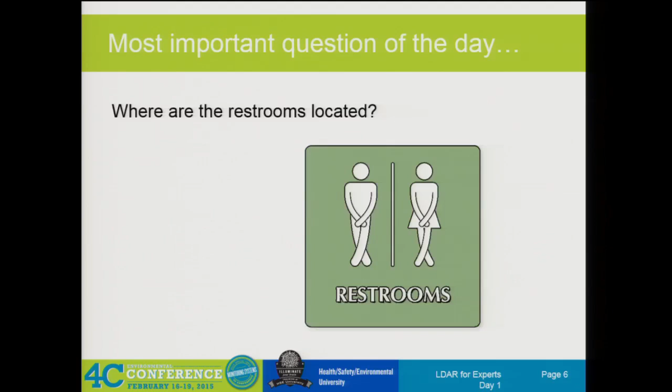They're not connected. You may have to help me get connected here. Chris?

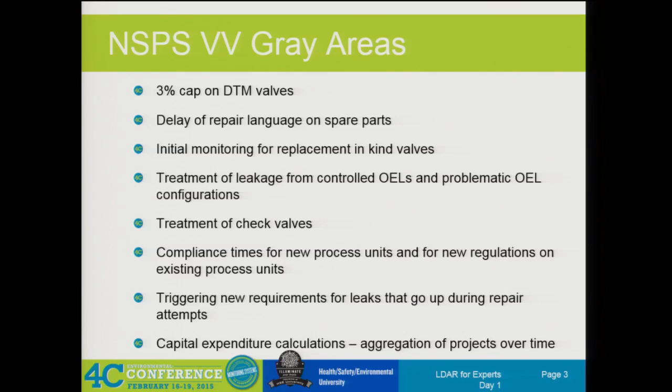All right, so we're going to start with NSPS VV, and since it was the very first of these rules and kind of set a pattern, there's quite a few things that are gray in it. In fact, the white pages that are in there are probably fewer than the gray pages, I think. And it keeps going. So we're going to deal with each one of those. I'm not going to talk about them now because we're going to get to them individually.

So we'll start with the granddaddy, the 3% cap on difficult to monitor valves. And for those of you who are really quick, we're going to have acronym soup all day long. So if there's any of these that I don't identify quickly, stick up your hand and ask if you don't recognize it. So here's the language in 482-7 subparagraph H.

Any valve that is designated as described in 60.486(f)(2) as a difficult to monitor valve is exempt from the requirements of paragraph A, that means A of 482-7, if the owner or operator of the valve demonstrates that the valve cannot be monitored without elevating the monitoring personnel more than 2 meters above a support surface. The process unit within which the valve is located either becomes an affected facility through 60.14 or 60.15, or the owner or operator designates less than 3% of the total number of valves as difficult to monitor.

In addition to that, you're going to have to follow a written plan to monitor it at least once a year. So, relatively straightforward, right? It just jumps right out at you what we're talking about here. One of the things that make these rules hard to understand are these embedded numeric paragraph references. These two right here in particular, this is subpart VV of 40 CFR 60. 60.14 and 60.15 are in subpart A. It was developed way before NSPS, but they're still referring back there.

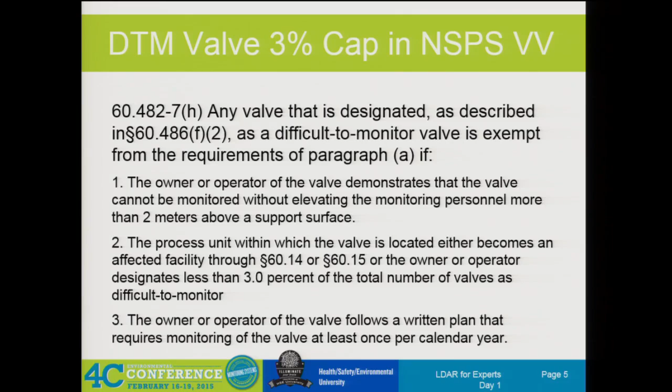So the first thing we got to do to try to understand this at all is go look up all of these numeric references and figure out what they're talking about. So if you trace 60.14 in subpart A back, that's the modification and the rules about what is involved in causing a modification that would trigger NSPS. 60.15 is the reconstruction section. So in a general way, not specific to LDAR, but just in general for all new source performance standards, this tells you what modification is and reconstruction is, and tells you something about the compliance times and a lot of other stuff. So there's some good information in there.

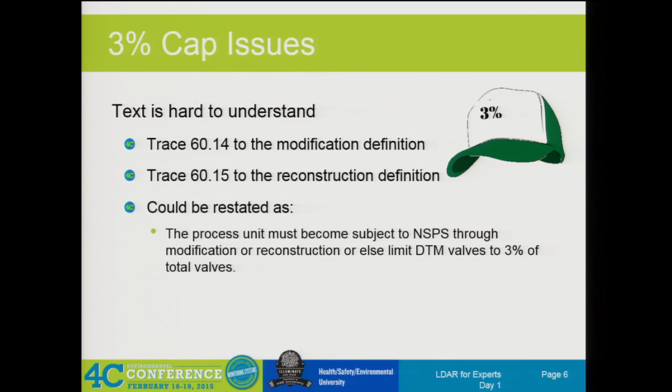They're worth reading. So you could restate that other part as the process unit must become subject to NSPS through modification or reconstruction, or else limit DTM valves to 3% of total valves. Okay, makes some sense. Starting to make some sense.

But, you know, nobody in here said anything about being a lawyer. Are there any lawyers in here? Okay. If you're hiding the fact that you're a lawyer, don't be offended by the things I'll say about you. But, I mean, the world would be just so much easier if it wasn't filled with lawyers.

So, if we think back to how could you become subject to a new source performance standard other than modification and reconstruction? When the rule was written in 1981, there was only one other way to get in, and that was to build a new plant. Like the name implies, a new source has come in, and it would be in the rule. So it seems once you get those two sections translated that it was really meant for new construction. Okay?

But since that time, EPA's written a lot of other LDAR rules, dozens. And they looked at NSPS VV and said, we've already created this masterpiece. Why should we write this same language over and over again? So they went and wrote GGG, and they wrote the applicability for it, a few definitions that were different, some testing protocols, light liquid defined a little bit differently than it was for the chemical facilities. And then besides that, they said, go comply with 482-1 through 10.

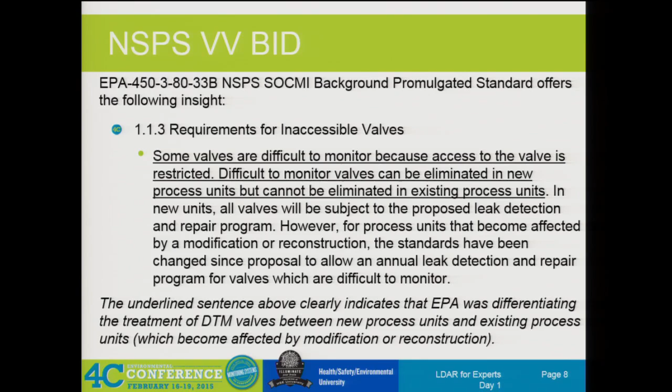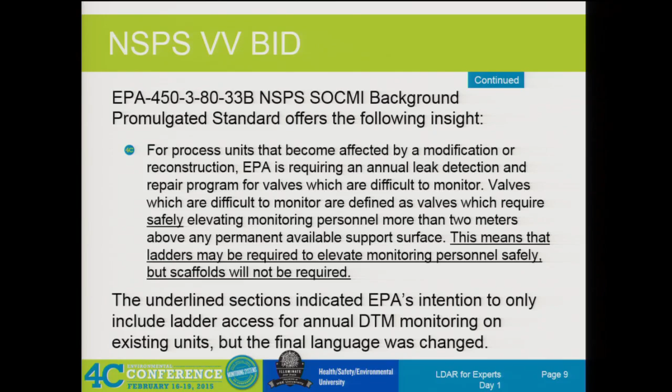There are plants that are represented in this room today that spend $1 million a year on scaffolding for DTM LDAR, primarily out in the interconnecting units and the flare runs. So this went by the wayside, but it's certainly an interesting piece that we ran across. Well, why would EPA just single out new units for a cap? I mean, if you shouldn't have that many difficulties, why not cap them for all kinds of units, right?

It's the difference between design for that limitation versus retrofit. And the whole idea of new source performance standards was that when you design a new unit, no matter what kind of emission control you're trying to build into it, you have more flexibility to get that done than if you retrofit the control to the unit.

Now, some kinds of controls don't really do that as much. If it's an end-of-pipe type thing, that you can run something that you were venting to the atmosphere through a carbon adsorber, through an incinerator, something like that, the cost to design it versus add it on may not be that different. And actually, most of LDAR is like that. It's a work practice that we have to do, and the work practice is not any less expensive for a new unit than it is for an existing unit.

But this is one of the places where new versus existing makes a big difference, because you got an existing unit out there. Some of those built World War II era are still in use, and it's not unusual to see 15 to 20% of total valves that are up in the rack with chain wheels or whatever hanging off the sides of columns that are genuinely difficult to monitor, very difficult to monitor in some cases.

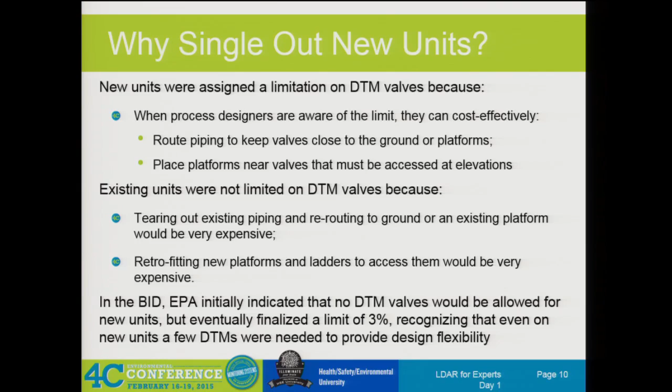So what people do when they have to comply after something's built is they'll take the least difficult and keep working through that hierarchy until they reach the 3% cap if they have to do it. But that's putting people into some danger, some jeopardy, a lot more often than they ought to have to do it. And it's a lot more expensive than you should have to do it. So the difference between designing it into a new program and retrofitting it is a big deal.

HON is somewhat better on it. It says process unit within which the valve is located is an existing source, or the owner-operator designates less than 3%. So that's fairly straightforward. They didn't get into the numbers. They didn't get into modification and reconstruction. Those really don't apply too much on a MACT unit anyway. But it's pretty clear here it was existing versus new. Okay? So that gives us something more to boost our confidence.

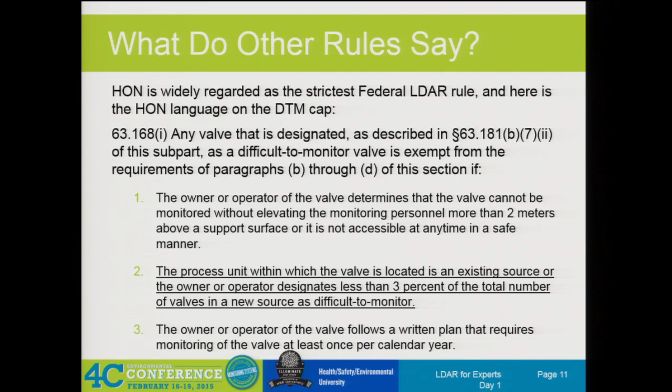So some conclusions on this. It has been literally interpreted to mean anything that didn't specifically come in via 60.14 and 60.15 for modification and reconstruction. At the time it was written, there was only one way to do that, and that was to build a new unit. But since then, we've got a lot of other things. And we still see a number of plants around the country that just blanket everything to 3%.

Okay? It's one of those ultra compliance assurance things, I guess. But the EPA guys, at least person to person, have verified, yeah, you're right, that's the way it should be. But they're not going to do a clarification until somebody actually formally writes a letter requesting it. It hasn't happened yet.

Chris, we saw something fairly new on this that I think added some weight to that as well. I'll see if I can pull that up and get it for you at lunch. But this came to our attention after we had to submit the final slides for this. That's why it's not in here, but I'll pull it up over lunch. All right. All right.

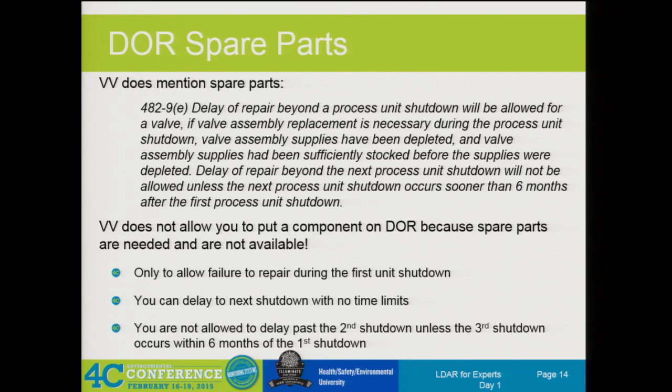The second one is if you have isolated it from VOC service for VV or from HAP service if you're under one of the MACT rules or NESHAP rules. Maximum Achievable Control Technology, NESHAP, National Emission Standards for Hazardous Air Pollutants. HAPs is hazardous air pollutants. So got a few of those acronyms I have failed to define.

So anyway, don't use it for the original. Put those 4 allowed reasons on your form with a checkbox. And then if you want a few lines to elaborate on why it's technically infeasible or how you've isolated it from service and so forth, that's good.

Before we leave the isolated from service, how many of you continue to monitor your delay of repair components that are isolated from service? I see some low hands. Yeah. What do you do when you start to get higher readings on them? Has it ever come up? Yeah. Yeah? It's not technically isolated. Yeah. Start looking at isolations.

One of the things operations guys like to do is say, okay, we blocked in the suction and discharge valves on this thing, and we drained it. It's isolated. Okay. When you come back and you monitor it and you get 50,000 ppm on that isolated component, it's no longer isolated. Okay? I mean, that's pretty clear. So what do you do then? You've already got a delay of repair that you've based on it being isolated.

Well, if you're leaking through one of the valves that isolates it, then it becomes technically infeasible without a shutdown. Because even if you wanted to pull that pump out and repair it, let's say it's a pump, that's where it happens the most, you couldn't isolate it to do that safely. So basically you have to go in and change your DOR documentation reason from isolated to technically infeasible without a shutdown. The key is to do that as soon as you start getting elevated readings.

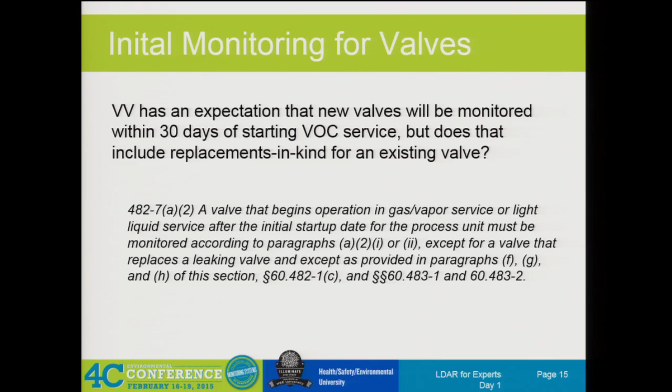Because you might work your way out to a quarterly or semi-annual or even annual monitoring period on the rest of the valves in the unit. So you may not be there within 30 days of when that thing goes in to see that you've got a new valve. So how do you find out about it? It would be really nice if this didn't apply to replacement in kind. So, monitor the valve is in paragraph A1. The valve must be monitored the first time within 30 days of its startup period. What's startup period? That's not defined in the rule.

If the valve's in a process unit, well, this is if you're in a skip period. NSPS skip periods are highly frowned on by EPA these days. Not many people using them. Anybody in here using an NSPS skip period? You are, sir? Yeah. Well, if you get to a consent decree, they'll probably force you into quarterly or do what they call a sustainable skip period. They've written a few that allowed that, which says you have periodic audits you have to do under the consent decree, and whatever leak percent they get will determine your forward practice, your leak frequency. So if you've been underfinding your own leaks and an audit says it's much higher, then you're going to have to jump back to monthly or quarterly or something else.

But this just gives you a chance there. You either have the choice of doing it within 30 days, or if you can just assume that new valve leaks and that won't put you over the 2% leakers in that unit, then you can wait either 90 days or till the next regular monitoring on that unit.

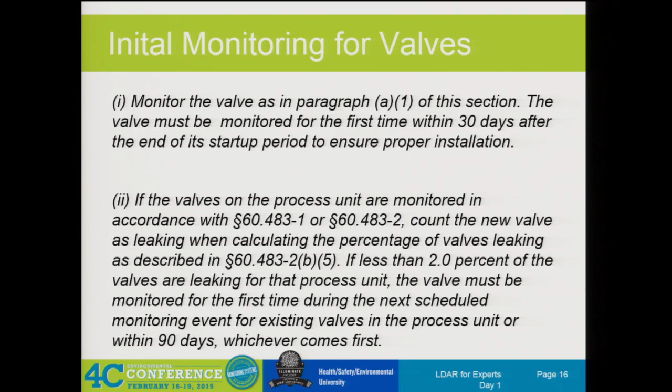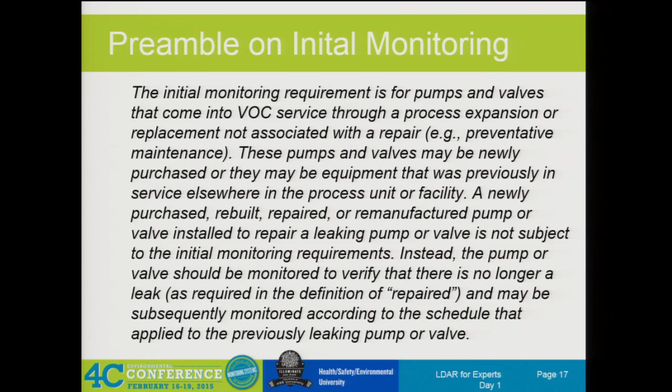So, if it's a replacement in kind that was to repair a leak, then it doesn't have to follow the initial monthly, but it has to follow 482-7C that says when a leak is detected, you'll go to monthly monitoring until you have 2 consecutives. So there's no change. I don't even know why they put the exception in there, because you're in the same position of 30 days, right? And all it's done is get people confused again. So leak repairs, you still have to do it. Yeah, the alternatives, not so much. All right. This is one that came up in enforcement initially.

Actually, down in this region, Region 6, I think was the first area it popped up. We had people out from the agencies, both the EPA region and the states, doing some comparative monitoring. So that's kind of a new thing from the late 90s forward. And when they came to a valve that had a plug or a cap on it, they'd go ahead and monitor the plug or cap too. And they started noticing that, boy, these things leak pretty often.

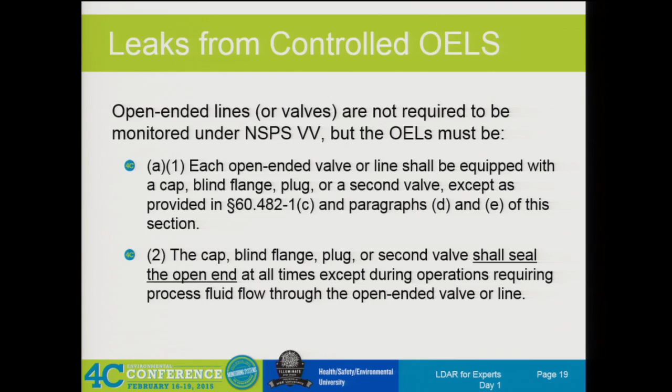And so they used that as the justification to write NOVs for open-end closure devices, as EPA started liking to call them, that have a reading above, say, the valve leak definition, 500. Most states, most consent decrees and things moving down there. Now, what does it mean by seal?

If you go to the dictionary, there's more than 24 entries for seal, including the cute little marine mammal that bounces the beach balls around. That cute little emblem on the front of the podium when the president speaks is a seal. The old things they used to do in the romantic novels where they'd put red wax on an envelope and stamp it with their family crest. Those are all seals. There are some that say it means to basically close an opening. And then there are modifiers, like to hermetically seal something means to seal it in a way that's airtight.

Okay? You need Johnny Carson folks in here with hermetically sealed and verified by Funk and Wagnalls or something like this that he and his sidekick used to always talk about.

But they're taking it literally and saying that seal means less than a leak definition around the potential leak areas, those threads. And we had in the uniform standards a proposal to say that any open-end closure device where you could monitor it and get a reading of 500 ppm or higher was an immediate deviation. As I mentioned earlier, the uniform standards are sunk under about 100,000 pages of comments and will probably never emerge.

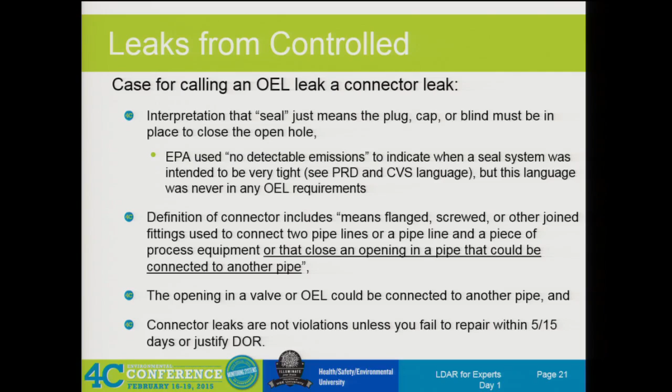So we talked through most of this kind of stuff. Here's a special deal on open-ended lines that comes up a lot. Besides the cap, plug, and blind, which are an actual closure, you're also allowed to comply by closing 2 block valves in a row before the opening to the atmosphere. And it specifically says that when you do that, you're supposed to close the upstream valve first and then the downstream valve. Why would that be?

Why would EPA care what order you open and close these things? If you close the downstream one first and then the upstream, you're going to trap product and pressure between those two valves. That means the terminal valve is now an open end, because one of the definitions of an open end is a single valve seat between the process and the atmosphere. So if you got process trapped between the valves, you don't have an open end closure. It's not a compliant system.

Okay? How do you get your operators to do that? How do you tell they did it? Well, unless you're standing there when they close them, I don't think there is a way to tell. So EPA would probably, based on like this 500 ppm thing, would say, all right, if we come along and we measure and we get some kind of a reading here, then obviously you didn't close them right.

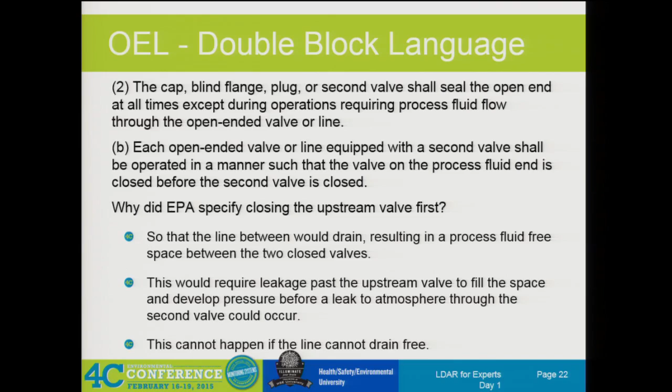So be careful with these double blocks. There's specific situations where even if you close the upstream valve first, you may not be compliant. We see a lot of these where maybe you've got a drain valve off the bottom of a control loop, and it's been set up to be a sample point. So the operator has got to get down there. Maybe that valve's 6 inches off the ground. He's got to tilt his bottle to get his sample. He's down on his hands and knees working.

This is ergonomically a mess. I'm spilling more than I should because I can't get the thing. So he gets a reducer and goes down to 1/2 inch or 1/4 inch tubing size, runs it over. So I'm going to be green. Let's take it over here by this drain hub, so if there's any splashing or spillage, it'll go down the drain, and up waist high. So I can have a gate valve there, and I'll put a second ball valve here, and I can, without bending and stooping, fill this thing up, less spillage, the whole 9 yards. I'm doing a good thing, right?

Except if you're saying you're controlling that by a double block valve, one here, one there, if you've got this kind of change of elevation, it's only going to free drain up to that point as you're taking your sample or venting or whatever you're doing. And so closing this and then closing that still traps process in all of that loop. So those are a much more subtle version that could get you in trouble.

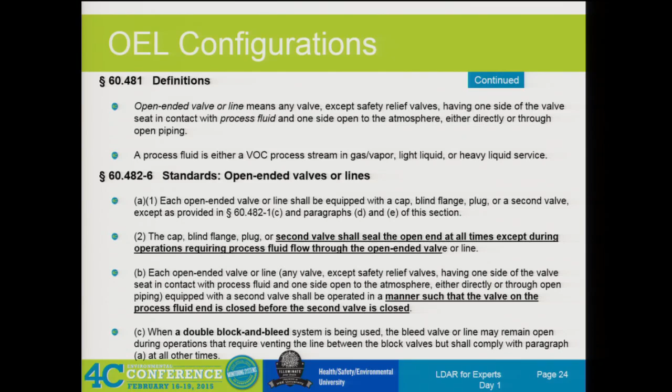Kind of a common sense issue. Nothing less common than common sense, right? And especially when it comes to regulators and enforcement people.

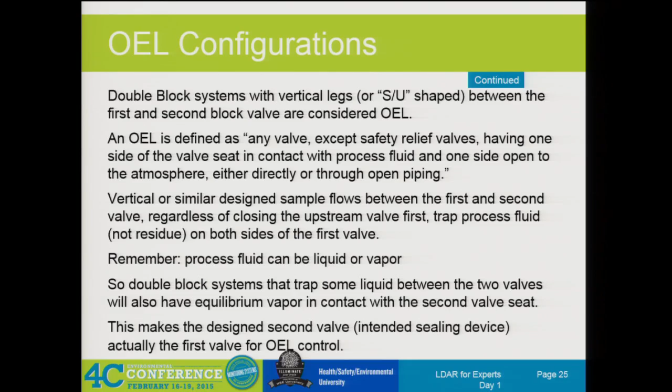So vertical legs, anything that traps material between the two. Process fluid can be liquid or vapor, so it's not only where the liquid is. Block and bleed systems, any of you use those? Got a block valve in line with each other and then a bleeder in between. If you want total isolation, you block both of those in, recognizing either one could leak past. You open the bleeder, and theoretically anything that leaks past one or the other will go out the bleeder without getting to the other component, cross-contaminating, or particularly if you have materials that could cause a runaway reaction or are pyrophoric, something that might cause big problems.

You can use those. And you are allowed, while both of the other valves are closed, to keep that bleeder open as part of a block and bleed system. So you can run that way. But you do have to close it as soon as you open either valve.

Okay? Now we get to a special version of that. I don't know if there's anything right here. We'll see it mainly in the components and low leak later on. But 12, twin seal valves. Anybody in here use twin seals? I know a lot of you do, particularly out in the tank farms. That's a block and a bleed built into a single valve.

It's kind of like a plug, and it's got a big quarter-turn mechanism, but it's got a full seat seal on either side and then a body bleeder. Now they come in several configurations or optional configurations. At the very least, they come with a thermal relief valve, because when that thing's open and then you close it, you trap it liquid full when you do that.

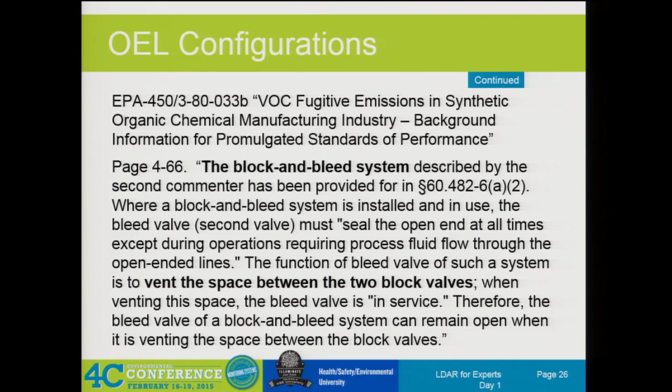So when you're running that valve open, that bleeder is a potential open-ended line. So that's one to watch out for. Engineering. Second valve, just more examples of where that's talked about, trapping fluid. Got that.

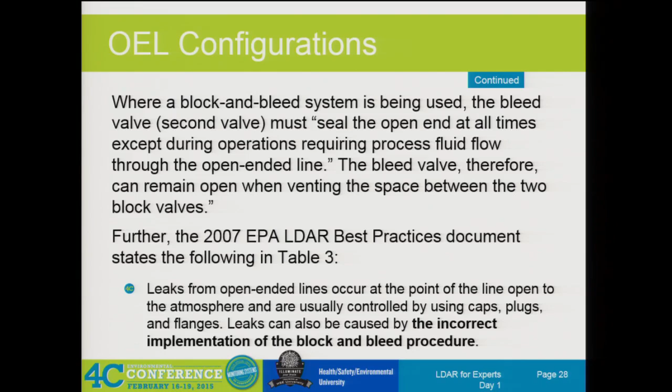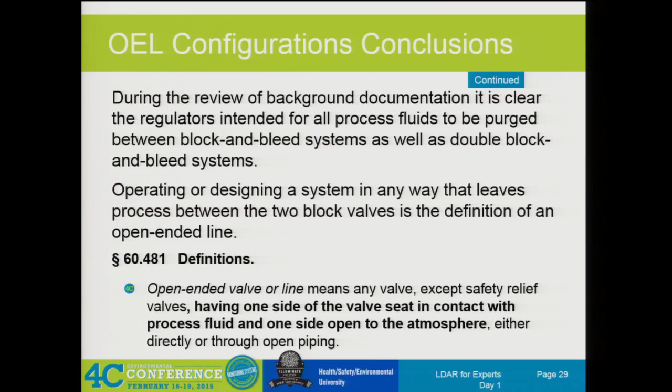All right, so you've seen the whole open-ended line thing is pretty complicated. Getting it right, enforcing it, all of these are pretty difficult things to keep straight. Now for something a whole lot easier. Check valves. That's a valve, right? Applies to 482-7. How many of you, let's do the hands. How many of you treat your check valves just like any other valve, monitor at the same frequency as all your valves? Okay.

You what? Depends on how it's configured. Okay. How many of you treat your check valves as a no detectable emissions valve and only monitor them annually? No takers on no detectable? How many of you say they're not a valve at all? If anything, they're more like a connector? Okay. Well, this is one where we do have an applicability determination.

Control number 01025. Somebody wrote in and said, is an inline check valve subject to the requirements of 482-7, or is it considered a no detectable emissions valve? EPA replied, since an inline check valve is enclosed within the process piping for directional control and does not have the potential for fugitive emissions, which are regulated by the standard, they may be considered exempt from subpart VV regulation as valves.

Then they didn't tell you what it is. Yeah, there are some that actually do have a test lever, I think they're called, or a hinge cover, nut, or bolt, and we'll see some of those when we go through the components. So there's a few types maybe I would consider a valve, but the determination we've got is pretty blatant that you don't have to regulate them as a valve.

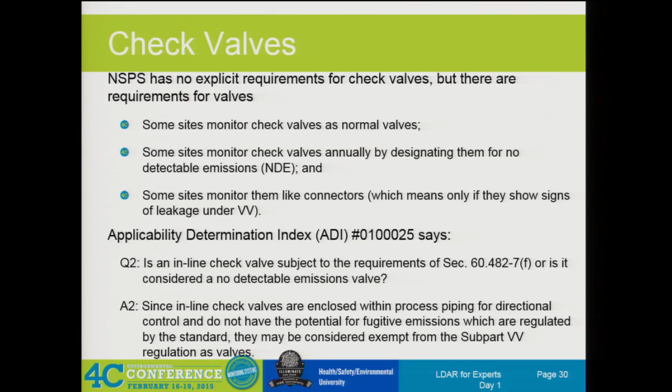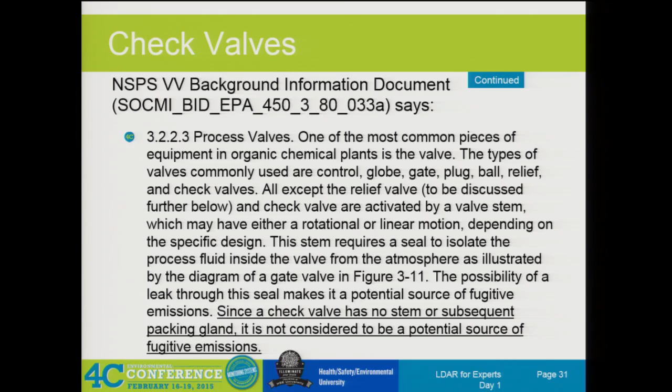And that is kind of connector-like, and that's probably why the majority of the hands I saw go up treat these as connectors, which in a refinery means if you see, hear, or smell, AVO detection, then you come check it. Otherwise, no scheduled monitoring or maintenance. Early stuff talked about the lack of a stem penetration, that being the characteristic emission point of the valve. All right, conclusions are pretty straightforward.

All right, this was an interesting one. The original 482-7 for valves said you start off at monthly. Any valve that has not had a leak detected for 2 successive months may be monitored the first month of every quarter, beginning the next quarter, until a leak is detected. Okay? They wrote this in 1981 when there were virtually no units under LDAR.

And they were thinking, you know, plants will have a sprinkling of these units become subject to this over the years, but didn't think too much about how it might create a situation where your labor requirements would be very unbalanced. Okay? If we had to literally do all of our NSPS valve monitoring in January, April, July, and October, we'd have to bring on extra staff in those months and then let them go for 2 months while we did the rest of the annual and quarterly stuff. Well, that's the quarterly valves, the bulk of the quarterly stuff there. So that would be an unworkable deal.

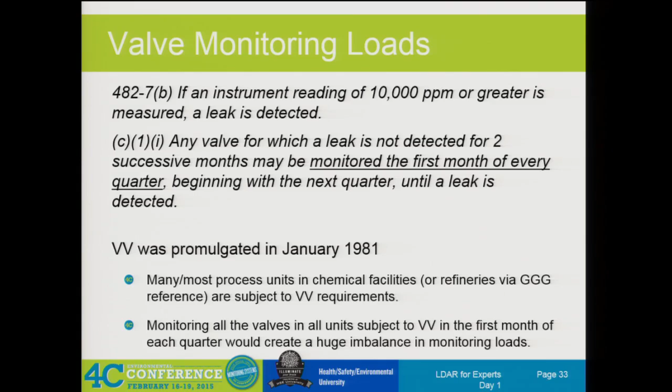People have worked around it by dividing up their units into 3 groups and assigning different quarter definitions for their 3 groups. I saw people that specifically had this all written out in their LDAR plan. Very well done. There's actually a hidden thing that makes this make sense, and that's the definition of quarter. Quarter, and this is the only period of time that is defined. There's not a definition for monthly or month or semi-annual or annual, only for quarter. It says quarter means the 3-month period. The first quarter concludes on the last day of the last full month during the 180 days following initial startup. Oh, I think I might have added something there.

But, so what does that mean? If you started up a unit on February, what's today, 16th? Okay. Then somewhere in, say, August 16th is your 180 days, not counting the differences in the month lengths. We could calculate it exactly, but somewhere in the middle of August would be the end of it. So that would mean the quarter ending at the end of July. July would be the last full month within your 180 days, because we only have a part of August. So then we'd go July, June, May is the start of the first quarter for that unit. Okay? Y'all have all got the dates of construction for all of your units, and you're being sure to run your quarters this way, right?

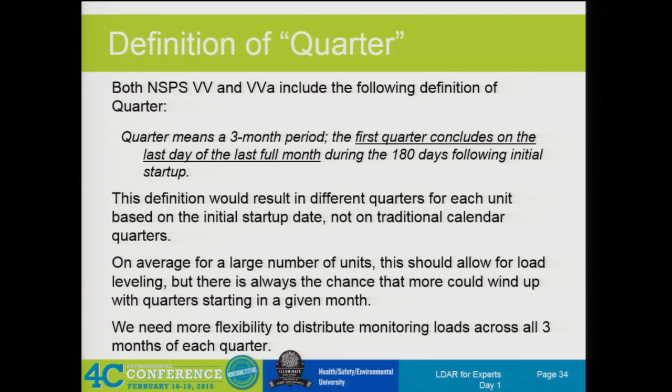In the 2006 stuff, EPA responded. We had indicated that there's some confusion on this issue. So they said, well, as an alternative to monitoring all of the valves in the first month of a quarter, you could subdivide your unit into 2 or 3 subgroups and do a third of the unit in the first month, a third of the unit in the second month, and a third of the unit in the third month. Well, that's real efficient, isn't it?

You tramp out there, you get your authorization to work, you got maybe one or two people working on it. There's a lot of gals involved in this work area now. And so they get a third of the way through, and maybe that's the middle of the second day. They got to go sign out of their permit, go back, turn in their data logger, get that all downloaded, get it assigned to a new unit, go someplace else, instead of just staying there and working on through and finishing it by the third day. Doesn't make much sense. It's not efficient. But at least it gives us a hint that EPA is not feeling it's a concrete deal that you have to have everything done in the first month of the quarter. So that's good.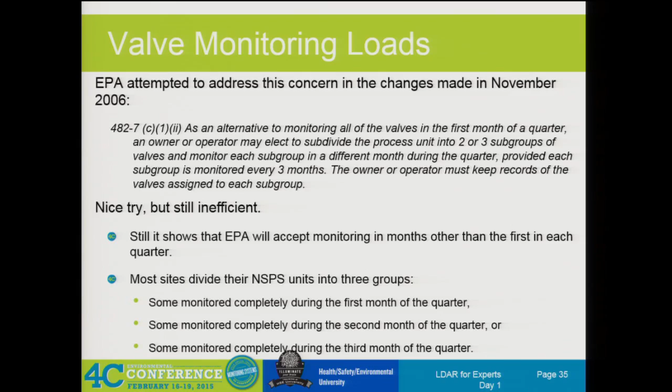Now this one. We're going to talk about common problems on Thursday, I guess. This is one that we see coming up more than almost anything else. And it says, okay, unit begins monthly monitoring, an individual component can move to quarterly after 2 consecutive non-leaks, right? But then it says if a leak is detected, the valve shall be monitored monthly until a leak is not detected for 2 successive months.

It does not say after the leak is repaired, a valve will be monitored monthly until it hits 2 consecutive non-leaks. So if they'd said that, this would have been a whole lot easier. It would have made sense. And this is where the DOR monitoring also comes in. It doesn't seem quite explicit that that's what they meant, but that's what the language says.

It gets a little sticky because, let's say you find a leak next week on February 24th, and you get your first attempt at repair done, and it's not successful on the 25th, and then you maybe make another attempt before the end of the month, but it's not successful either. And then around the 3rd of March, you go in and you do something and you get it below leak definition. So it's successfully repaired now, okay?

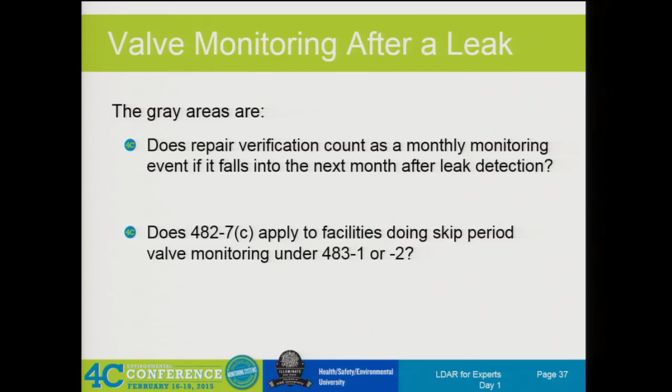So I don't quite buy it, but there is enough of a dialogue there that I know of one whole corporation, like I say, that's got it in writing internally, and they follow that at all of their plants. And I know others where individual plants within corporations do it, but the rest of the plants don't. But that is one that's kind of gray. But the main one is the months.

I think most of us think about repair verification different from scheduled monitoring. But there's not a lot that I can find in the rule language or the BIDs and that kind of thing to support it. I can tell you this, as you read the background information document for NSPS VV, they talk about the reason that they put this in there is to detect and repair an early recurrence of the leak.

One of the things we found in that 70s and early 80s vintage research work is we took a body of valves that we'd found leaks on, they were repaired by the site, and then we would come back several months in a row and recheck things. And I mean, leak frequencies were high at those times anyway. Around a 10,000 ppm leak definition in those refineries pre-LDAR, we were seeing 10% leak rates.

But of the valves that had already leaked once, for the first 3 months, there was an over 20% recurrence of that leak. Probably indicating that maybe the repair was a little slipshod or whatever. It just probably indicates that it was one of the more severe service categories. It was more challenging to the packing, or the packing was pretty well worn out and cracked. And you could get it down for a little while, but you couldn't keep it.

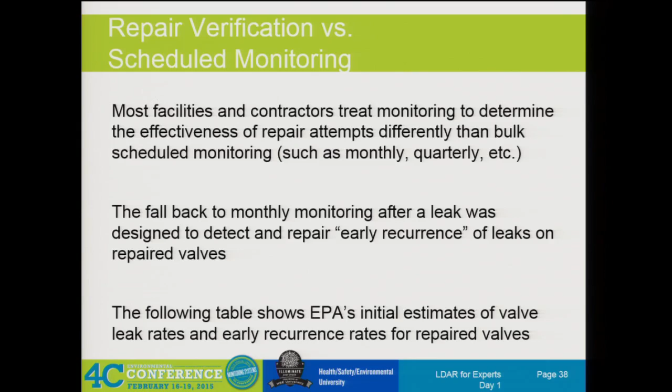It just kept coming back. So it has some language where they talked about that the follow-up monitoring was designed to detect and repair early recurrence of leaks. And here's some of the data they had in here. I apologize, this is small print, but let's look at valves.

Vapor service, they were about 10% of the initial leaking. If you went to an annual rate, it would go up to about 20. Quarterly, it was 10, and if you went monthly, 5. Of the ones that leaked, the estimated ones which were found leaking in subsequent inspections, what's the difference here? Estimated leaks are found at subsequent inspection.

Okay, so this is from the initial. If you followed it up annually, 20% of them were leaking. And that's not 20% of the total population, it's 20% of the valves that leaked again within the next year. If you came quarterly, it went down to 10. And if you came monthly, it would go down to 5% of the valves leaking.

So with 2 monthly monitoring events, they thought that was going to catch and detect, make a more permanent repair on these valves that did find leaks. Those numbers don't look like they were estimated using the actual data. I mean, because they're too round? Yeah. Yeah. There was data behind them.

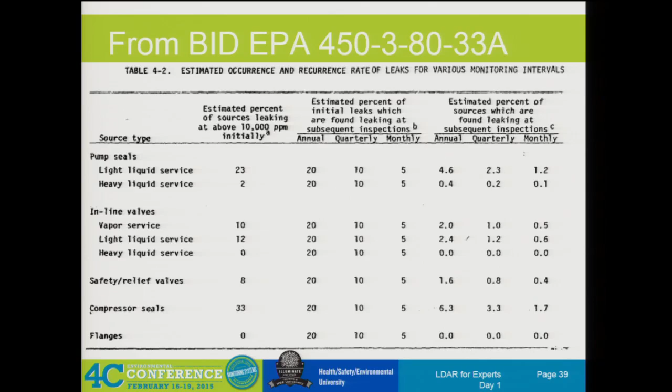I mean, some of these you'll see 2.4 and 1.2 and 0.6 in this subsequent after the first. This is the first reinspection, and then that's the second reinspection. So I don't know why they put them round. There was definitely some data behind it. It's not definitive by any means. So this is why they wanted them done.

And if what you were trying to do was stop reoccurrence, that doesn't happen until the prior leak is repaired, right? So you can kind of infer from this logic that they meant for it to be repaired, which at the time the definition for repair was to take the physical action that caused the leakage to stop such that it was below a leak definition.

But it never said that you had to actually monitor and show that it was below the leak definition within the 5 and 15. We got Frank Burgard, I know, is here this week. I don't know if Maurice Pender is going to be here, but they used to have a little show they did almost every year at ISA, arguing back and forth between whether repaired had to include a monitoring event or not.

Obviously, if you don't monitor it, if you're going out to the 15th day and you go put a wrench on it and say, okay, we're not going to put it on delay, and then you don't get out to repair it till the 16th or 17th day, if it shows it's repaired, you're good. But if it doesn't, you're already now in a deviation because you didn't put it on delay.

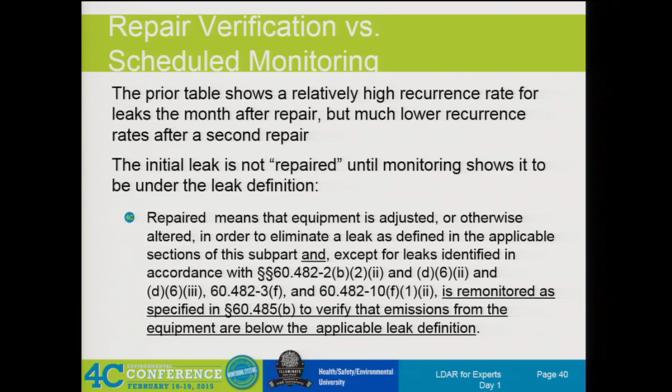So it doesn't make any sense to do it, but in the 2006-07 changes, they changed the definition of repaired to physical action to reduce or eliminate the leak and a monitoring event that shows a below leak definition reading. So now we don't have to worry about that. But it seems you could infer that recurrence would be after the repair, so they were looking for 2 months after that. But there's no other language I can find that differentiates between one kind of monitoring and the other, okay?

So at this point, when we find these where they were at this straddle at the end of the month, we'll put it in as a supplemental observation. I won't call it a hard non-compliance issue if they counted that as one of their 2 months. But we'll bring it to their attention that it doesn't seem to be within the intent, although it may be within the letter of the rule. And you might want to consider tracking this outside your database, because it's very hard for the database to understand that difference.

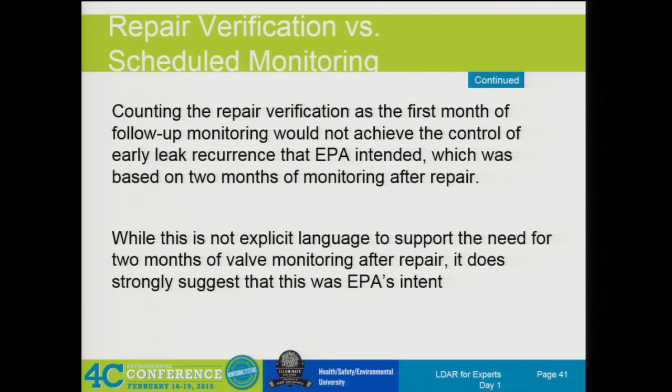All right, well, this is just what we're actually talking about. There's going to be times that EPA recognizes you're not going to be able to access your unit and get out there when you normally do. Obviously, if you're on a quarterly basis and your unit is out of service for that entire quarter, then you have no opportunity to monitor it. By out of service, I don't mean just not running, I mean purged of product and not in VOC service, okay? If it's down but liquid full, you can go ahead and monitor.

That's not the ideal time. You're not going to give it the hardest test for finding leaks, but if that's your only time to access it, you're better to go ahead and get it monitored under those conditions as not producing but liquid full or fluid full than you are to try to skip it.

But if you have to shift some things around, good one, Chris, to get some flexibility to work around downtimes, hurricanes, all the other real life things that interfere with our normally precision monitoring schedules, then the general standards 482-1 F3 gives you reasonable intervals. And these reasonable intervals are expressed as the minimum number of days you can have between any two successive monitoring events.

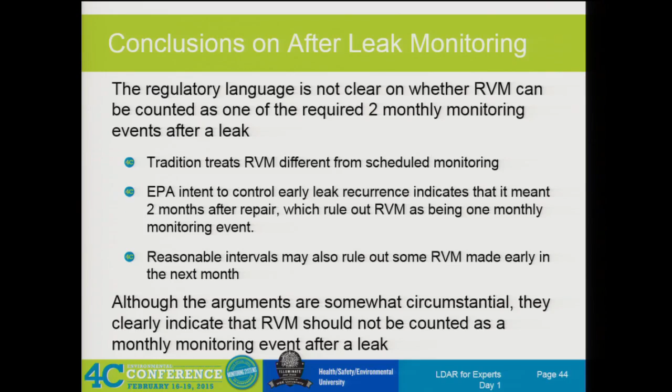So conclusions here. Reg language, again, is not super clear, although it certainly seems to suggest that after a leak is detected, you begin monthly monitoring rather than after repair. The BID is fairly explicit on the fact that early leak reoccurrence was the reason they put in the follow-up monitoring, and with their data, they're showing that 2 monthlies would find the vast majority of these early recurring leaks, and reasonable intervals might restrict even some of those.

So skip periods. A couple of things on those. We were talking about another one during the break. You got 483-1 and 2 in the NSPS. 483-1 is almost never used. This one says you got to keep your valve leak rate under 2%. You got to demonstrate it initially and annually, with a 10,000 ppm leak definition. And if you should find it over 2%, or if EPA finds it over 2%, it's a deviation.

It also says something about monitoring them all within a week, which for a big unit like you were talking about with 8,000, you'd have to put quite a few people on that to knock it out in 1 week. So this one is kind of interesting, but few, if any, facilities have used it much. It may be something in fine chemicals where the stuff you're processing is so low vapor pressure or so unlikely to leak that you can feel confident it'll never get over 2%, but I haven't run across it being used much.

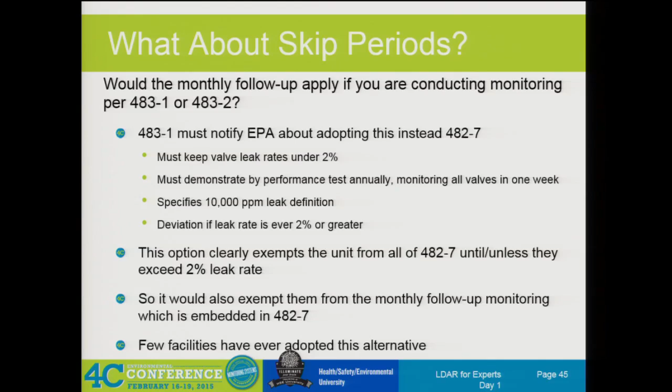The 483-2 used to be used quite a bit. EPA denies it in most of their consent decrees, so it's being used less and less as we go forward. And they definitely prefer the HON style of skip period to this, or performance-based monitoring is probably the better way to talk about HON style, where this one literally is a skip period.

So initially, you comply with 482-7 until you get the majority of your valves out to quarterly, and then you can elect to go to this 483-2, and after 2 consecutive quarterly leak detection periods at less than 2%, you can go to semi-annual monitoring, therefore skipping 1 quarterly monitoring period. That's why the name skip period has come about, although it's not really called that in the rule. And then it says, or after 5 consecutive quarterly leak detection periods with less than 2%, annual monitoring is allowed.

And that's actually a little different than the way most people do it. Most people go 2 quarters and go to semi. Then if you go a couple more semis under 2, you'd go to annual. But by saying this has to be 5 consecutive quarterly leak detection periods, it would say if you drop off after 2 to semi, you can't then move on to annual. I don't know. Everyone that I have ever seen operate one of these did it that way.

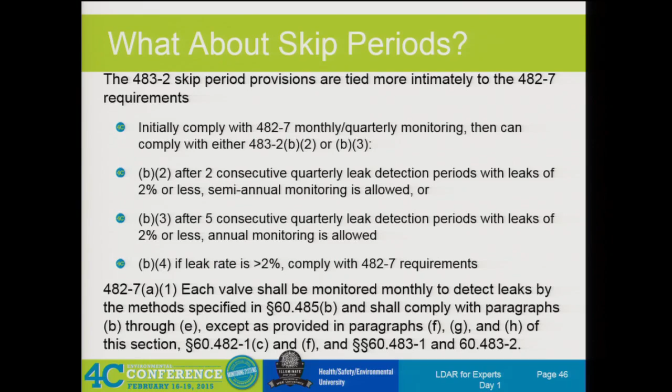And if somebody wrote EPA and asked them to clarify this with an ADI, given the current state of things, I expect they would say, yeah, that's what we want you to do. But reasonably speaking, you've got under 2% that have leaked in the most recent monitoring period. So probably you've got 96, 97% that haven't leaked for 2 consecutive periods.

Now, the fact that those were 2 consecutive semi-annuals or 2 consecutive annuals actually makes the probability of that valve leaking anytime soon even lower than if you had 2 consecutive monthlies. If it's been steady over that long a period of time, it's more certain that it won't leak. So why would you pull those in?

Without clarification, what we suggest to people is that you follow 482-7, which says that anything that has 2 consecutive non-leak, it actually says 2 monthly non-leak, but again, they were thinking in terms of linear application of these rules. You come in, you have nothing going on, you start monthly, you do 2 months. Those that haven't leaked after 2 months can go to quarterly, or any others that leak after they've gone 2 consecutive months, then they can go up. They never really thought about how you would loop this thing back around.

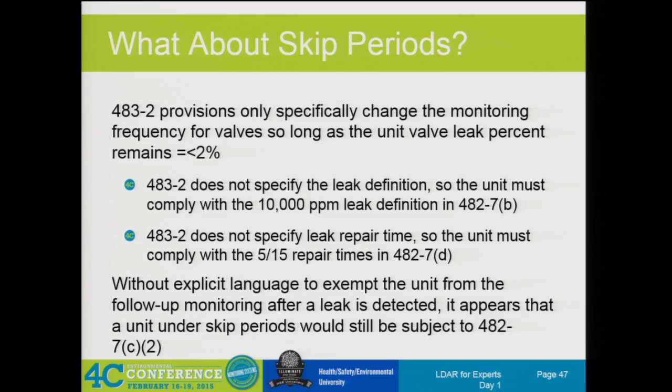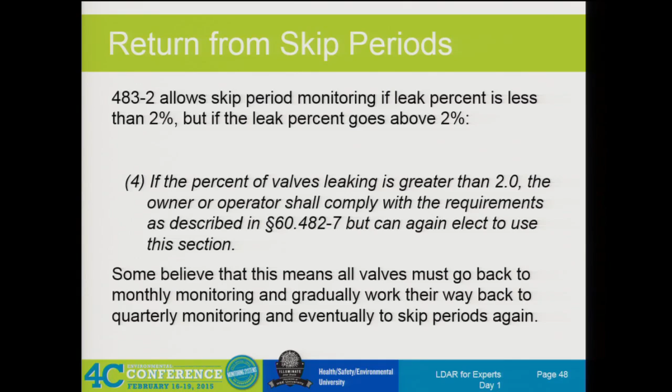So you'll have to decide what your risk tolerance is on those things, just like investing or whatever. If it keeps you awake at night, go ahead and send them out there monthly. If it doesn't, then take your chances. So it says you're going to go back, but you can elect it again. So this is just what we've been talking about. 2 successive months.

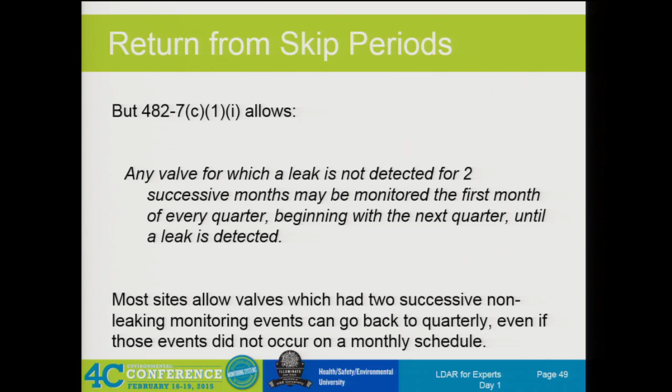And that's a by unit, by process consideration. Yeah, all of the NSPS stuff is meant to be analyzed by unit because they never thought that we'd have blanket coverage. They thought it would be a little checkerboard out there and it would only be realistic to do it on a unit basis.

This is an interesting one. In the record keeping section, there's fewer gray areas in that than in the requirements. But here's one. 486(e) says the following information pertaining to all equipment subject to the requirements of 482-1 through 10 shall be recorded in logs kept readily accessible. A list of identification numbers for equipment subject to the requirements of this subpart. What's 482-8? Anybody remember?

Oh, yeah, I should have covered that up, huh? So it's all your AVO monitoring stuff. Heavy liquids on pumps and valves, any liquid on pressure relief devices, and anything, including gas, on connectors. You have no scheduled monitoring, but if you see, hear, or smell something, you have to go out and do it. So all of your heavy liquid components, all of your connectors, all of your liquid relief valves are subject to the requirements of 482-8.

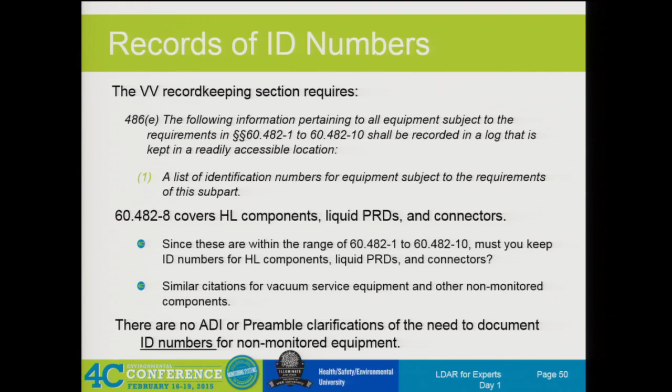So is this saying you have to have a list of identification numbers for all your heavy liquids, all your connectors, if you have no monitoring requirement? You do have it? We've elected to tag everything. Yep. For EI purposes. Good. If you've got a reason to do it other than this requirement. We haven't been able to find anything in the ADI or preamble to clarify it. But again, trying to go back to common sense, what makes things work.

These heavy liquids, liquid PRDs and connectors really don't become subject to the requirements. And the requirements are to, within 5 days, either monitor it to show whether or not it's a vapor leak, or to repair it to get rid of the sensory indications of a leak within 5 days. So that's really the requirement. So something is not subject to that requirement until you have had an AVO indication reported for it. And so that's the rationale that lets us get by with not having IDs for every heavy liquid.

If you're going to have an AVO come into your system, you should assign an ID number to it so that you can document compliance with the 5-day requirements to either monitor or repair it, okay? So that makes sense. Going out and hanging tags or assigning numbers in the database to things that you haven't identified in the field is totally unproductive.

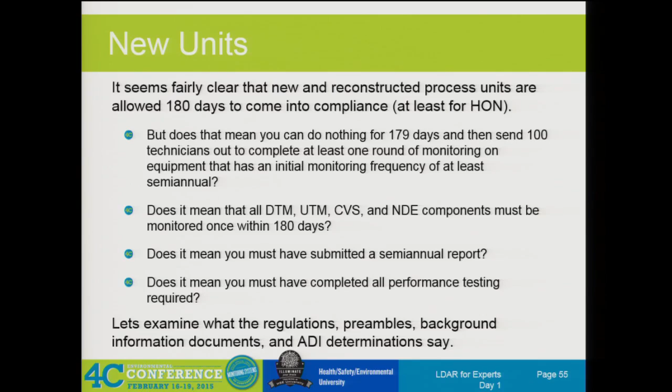I think if you go back to those initial subpart A discussions, all the performance tests have to be completed and reported within that 180-day to show that you're in compliance. The only true performance tests would be NDE monitoring, and if you have a control device that your closed vent system goes to, that's other than a flare, which is based on characteristics of the flare rather than an actual test, to show 95% control. So those have to be done.

We know that. Let's think about what else, though. So why did they give us so much time? What do we have to do? You've got to get through that startup and unstable period. That could last a while. You've got to mark up all your drawings. You've got to get the people out there on the unit when it's safe to do so. That sometimes can take months.

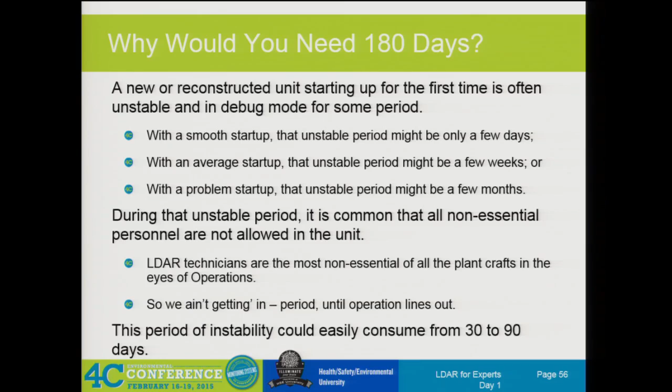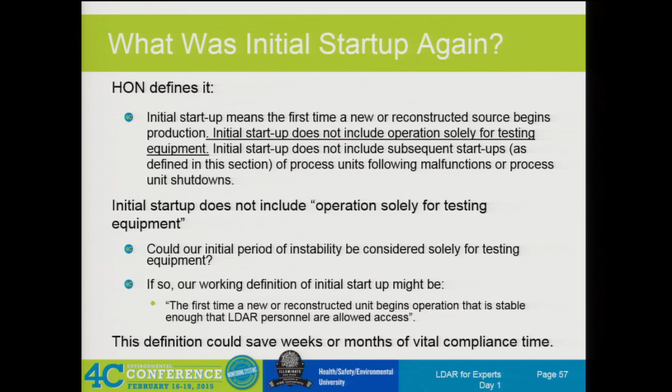There was one facility that had some famous issues, and they started a contiguous area blackout. If any unit that bordered a unit was having problems, as little as the speaker that would come on and say, if the alarm went off, this is a gas release on such and such. If that speaker was out, the 5 or 6 units that bordered that all allowed no non-essential personnel. So huge portions of a plant could go out for one little malfunction. So access is a pretty big deal. Yeah, we talked a bit about that.

Besides that, you had to determine which regulations apply. You say, you had to do that when you permitted it, right? Well, new regulations can be promulgated between the time you made your initial permit application and the time you're constructed. You could have new interpretations of the rules that were already there. So you've always got to go back and finalize it. You've got to mark up your process diagrams. And yeah, you can do that before startup. You've got a design set of drawings that you're going to work on. But there's always going to be some slop in that.

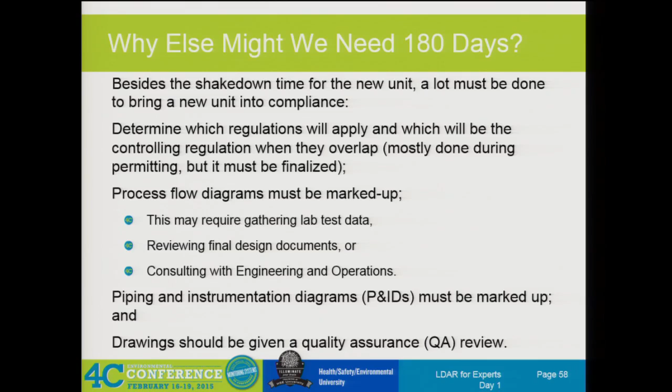How many of you ever saw one that came up where the as-built met the design drawings precisely? Almost never. I'm sure it probably has happened somewhere sometime where somebody was cookie cuttering unifiners or whatever, and the 100th one they finally built exactly the way they intended to. But I've never seen one or been involved with tagging one. So you're always going to have to make a repass to catch those things. And QA reviews, you know, to do this right, it takes a lot of time.

Then you're going to have to flag streams. I don't know if everybody has adopted that part. We used to just tag and document. And in more recent years, we've added the flagging stage where you go out and put a piece of surveyor's tape or a label at the start of one stream and at the end of that stream. And then everything between that, you've got all the data for documentation on the beginning and end tags, and then you have everything that's later tagged per the flagging. So the flags have got to be developed, they've got to be hung in the field, and you've got to get them QA'd.

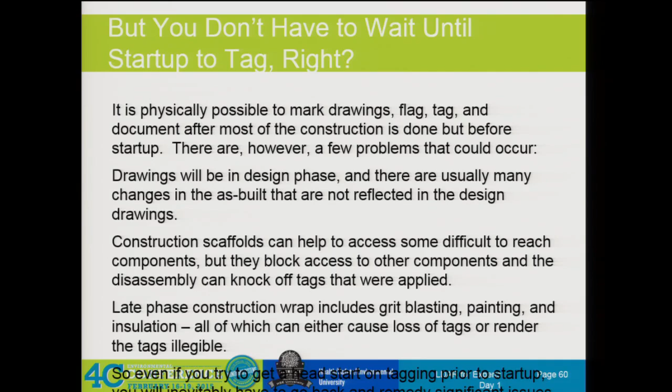Components have got to be tagged, then documented. All that's got to get up into the database, and then you have to QA all of that, get monitoring schedules set, regs applied, and figure out when you're going to monitor each one of these things. You can do a lot of this before startup. But what's the last couple things that happen during that construction period? Sandblasting, painting, still got a lot of scaffolding up, a lot of overhead work, there's safety issues, and if you do hang tags, you can count on probably losing 15, 20% of them during that last couple of weeks before startup. So you're going to have to go out, find those, replace them, and get that all set before you can really start to monitor.

All right, you don't need to know what all these 10 sections say. But basically, you're going to have to start monitoring your pumps at some point during that. You're going to have to get your compressor seal criteria documented and make sure you meet that, or else designate it as no detectable emissions, and get your initial performance test on that. You're going to have to get your pressure relief devices in gas vapor service tagged and know how you're going to track triggers on those. You're going to have to get your routine sample systems in gas vapor, light liquid, and heavy liquid. Everybody know that heavy liquid sample systems still have to have closed loop, closed vent, closed purge?

The way NSPS VV applies, the applicability, is in the title of the section. So if you go to 482-7, it's valves in gas vapor and light liquid service. You go to 482-2, it's pumps in light liquid service. So by not saying heavy liquid, you don't have to monitor pumps on a monthly basis like the requirements in 482-2 are. That's all picked up in 482-8 with the AVOs, okay?

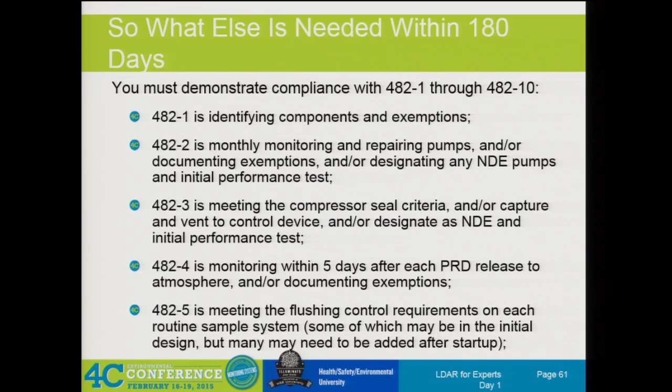Your open-ended lines, you've got to identify them, get your closure devices in place. You've got to start monitoring on your valves sometime in that period. And maybe get some kind of a start on your difficult and unsafe NDE. Few people are using NDE anymore. I think it's more trouble than it's worth.

Because even if you have, say, a bellows seal valve, which is pretty close to NDE, those with vibration, with corrosion, over time can fail. The bellows can puncture or crack, and you can have a leak there. And when you find that with an NDE, that's a deviation. So most people would rather just have it be a leak and you repair it. So they'll go ahead and monitor it more often than annual in return for not having an automatic deviation when and if it does leak.

482-8, you've got to be responding to any sensory signs of leakage that your operators or others might report. You've got to set up your delay of repair process. At this point, you probably haven't done much monitoring, so you haven't found many leaks, and you don't have much to do there, but you've got to have it organized.

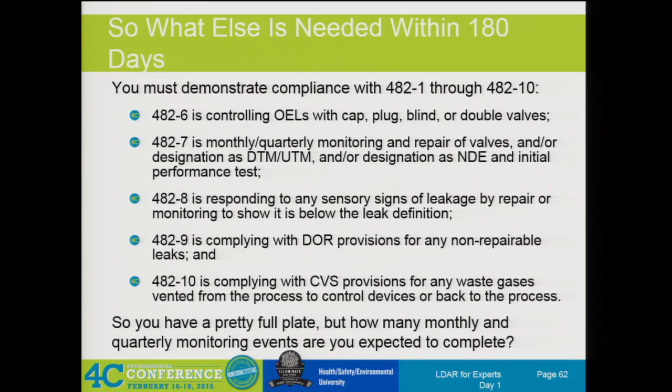And you're going to designate a closed vent system going out to a control device, flares for most of us. So you have to know how you're going to do that. You're going to have to tag it, identify it, and so forth. So there's a fair amount of stuff that needs to get done there.

Up till, this was probably what, 2011? Yeah, fall of 2011. We all thought it made good sense to get started early and do this stuff as quickly as you could, but as far as a compliance deadline, we had the full 180 days to complete everything, okay?

Now, the Alabama Department of Environmental Management, ADEM, wrote Region 4 because they had disagreed with one of the plants in the state about the way they started up, that they didn't get going with their monitoring till very late in the 180-day period. So they wrote Region 4 and said, this 180-day compliance, can you wait that entire time, or are there any interim requirements?

And Region 4 replied back in a letter to ADEM that while you had 180 days to fully comply with all, it is not a grace period during which the facility is exempt from work practice standards, and therefore pump and valve monitoring should begin within 30 days of initial startup. Ouch. Ouch. But this has been 2011, and for quite a long time, that never got picked up as an ADI.

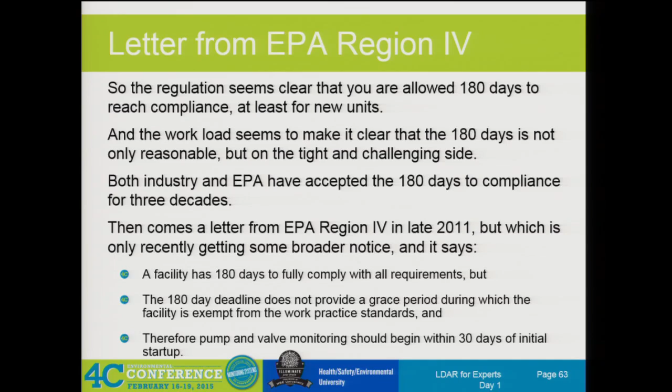So we were kind of telling people, it's interesting to know that that's out there, and you probably ought to do your best to get started early. But 30 days, I don't think in many cases that could safely be done. It's really going to be pressing the envelope. So I would say, be reasonable and start as soon as it's safe and you can do the work with quality. And at that time, it was a regional affair.

Okay. You notice we've got some strikeout type in here now. In the August update of 2014, this letter went into the ADI. So it now has national applicability.

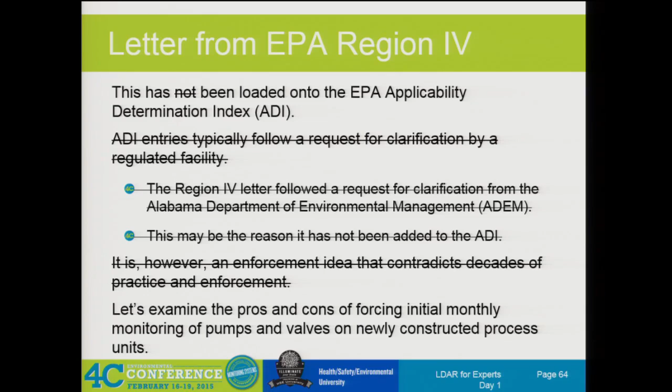I don't know why it took so long, why they thought about it, but it's there. For better or worse, for worse. There's not much better about it. I got some pros and cons. Suffice it to say, the pros, there's only one. If there's some early leaks on those valves, your monitoring is going to catch those leaks and they'll be repaired a little sooner than they would have been otherwise.

Okay? The cons, I've got probably 10 pages of them. We don't need to belabor it since it's less of a judgment call now. So one of the things I learned out of that, whenever I've been on the ADI before, I've always just gone in and done keyword searches. And it's a good idea when you're first working with it to do that on all of the things that you're puzzled about, interested in, whatever.

But instead of going through the keyword search, there is also something called check for recent updates. And then you'll get a list. They don't put these things in one by one. They batch them in a couple of times a year. So once you think you've found all the ADIs that pertain to you and your questions, to keep up to date on new developments, just go in maybe once or twice a year and look at the recent updates. So that was a new learning for me on this one.

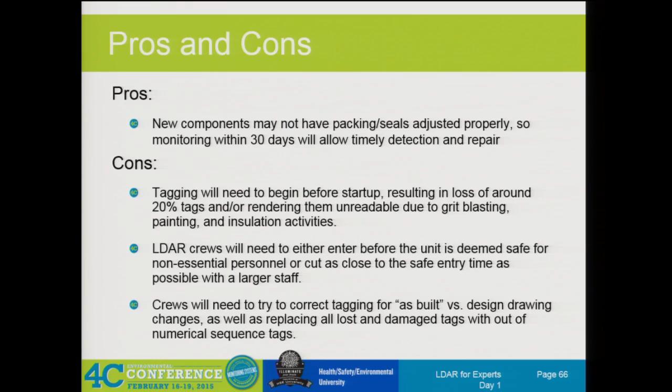The cons, we're not going to belabor them because they're all over the place. You know, you're going to lose tags. Crews are going to either enter before it's deemed safe, or they're going to be cutting it as close as possible. They're going to need to correct tagging for as-built. They're going to probably have to import a larger crew for both tagging, documenting, and monitoring.

And, not to belittle anybody, but whenever I've seen this situation take place, you usually don't get the quality of work out of somebody who knows he's coming to this site for a week or two and then going away, doesn't have to live with the results. They're probably not going to do the same quality work as the people who have a long-term vested interest in it. So I think you lose quality there.

You're probably going to take a lot of time to get all the tags on and get everything identified, so you're going to be smashed into a small number of days at the end of that to get the monitoring done, so it's going to be rushed, and when we rush, we don't do as good a job as when we have the time we need to do it at a normal pace. Safety issues in everything we do is going to be a problem. We've got that definition of a quarter.

We brought this up about load leveling before, but it also applies here. Again, we ran through that definition, so in our example for one that was starting now, we had to begin quarterly monitoring. Our first quarter would be in May, start in May through July. So there is some kind of implication that if you're going to start quarterly monitoring in May, you would have to do March and April monitoring in order to have 2 consecutive monthlies to jump up there.

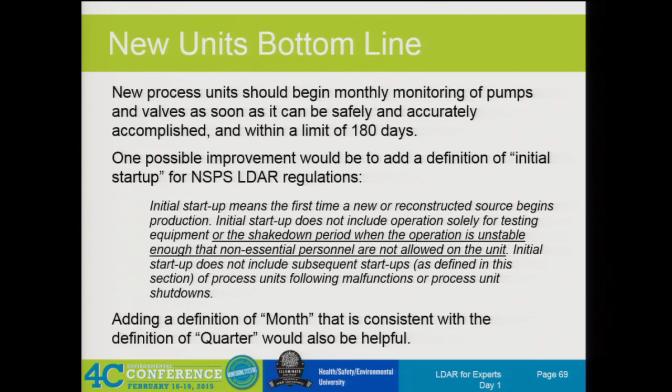Whenever I've seen somebody do that, even if the agency differs with your definition, they seldom hit you with a fine on something like that. They'll say, we disagree, you need to change your manual, and in the future do it this way. Okay. But then that'll force them: well, if you want me to do that, you need to make this an explicit clarification. Or you can use it maybe to force them, who knows?

If I could ask. Yes. What I think I just heard is, in our LDAR manual, we define initial startup. Yep. And just as long as you're consistent. Now, if you have HON or one of its clones, there is a definition there. So then the only wiggle you have on that, they don't define solely for testing.

So you could put a definition in your manual that says, anytime our unit is not stable enough that they will safely allow non-essential personnel, that's personnel other than operations or critical repair personnel, we will consider that kind of operation to be solely for testing. Other than that, you're going to have to live with the 30-day.

All right, existing units, we can speed this one up a little bit. There's actually a couple of categories. If you had a unit that was in VV and you did some modification work to it that caused it to go up into VVa, okay? Now you've already got your drawings highlighted, your components tagged, it's all documented in a database, you've got monitoring history on them. So it really shouldn't take 30 days to get to your next one on that. Shouldn't be a big deal, okay?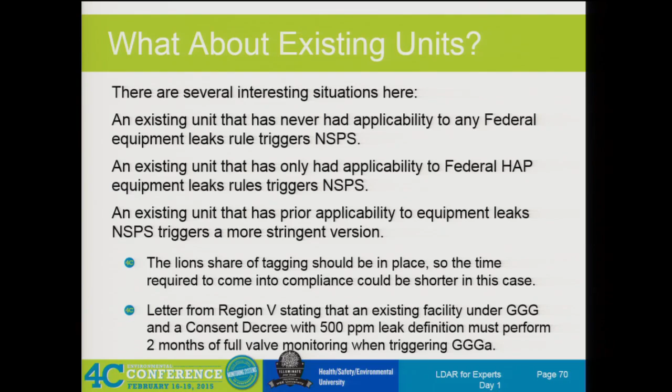But until you've done it with the monthly monitoring, you haven't fully complied with and adopted VVa. So you still have to run the triggering tests, and then when each unit triggered VVa, you'd have to go through the 2 months of complete monitoring. Not said, but implied. So we got that running around too.

These things we can zip through pretty fast. Just saying that we're going to have pretty much the same 180 days and the same task to complete within that time: all the tagging, flagging, documentation, and monitoring.

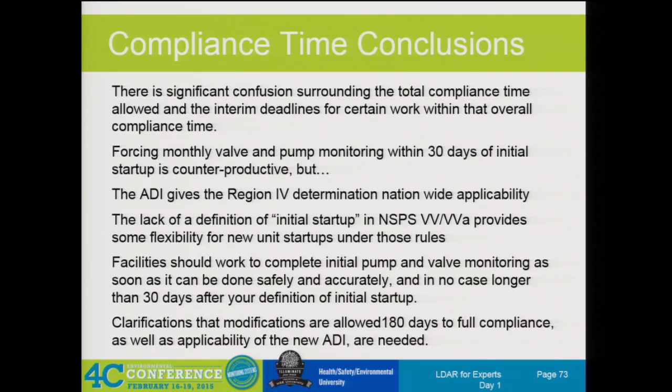So this is one where over the last 3 or 4 years, we've gone from thinking we had a pretty clear idea of what we needed to do and what was allowed and what wasn't, to now being forced into a very rapid initial monitoring for all valves and pumps after initial startup. You do maybe have some flexibility on definitions, but not a lot beyond that. And again, these same issues would apply to new units and units that newly trigger an NSPS.

Okay. All right. This is a quick one, kind of a fun one. Shows how you can screw up the language. It says in the test methods, a mixture of methane or normal hexane and air at a concentration of about but less than 10,000 ppm methane or normal hexane is what you're supposed to use. Okay?

Remember, when this was written, the leak definition for all component types was 10,000 ppm. And the primary analyzer we were using was the OVA 108. Had an analog scale and had a zero adjustment and a single span adjustment. So you could only set it to one calibration gas value. That scale read up to 10,000 ppm. So if you had a calibration gas that was 10,050 ppm, you couldn't set it to that value because it was off the scale.

So a forward-thinking person would have written this as a mixture of methane or normal hexane and air at a concentration that's within the limits of detection of the analyzer. Would have given you the same protection, but it would have been viable throughout the years.

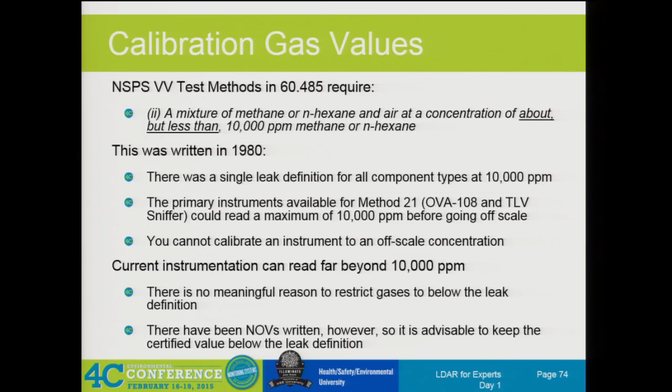Fast forward, and not many times, but at least half a dozen, maybe 10, I've had plants call me up and say either EPA or their state was hassling them because their cal gas was over the leak definition. And not just the 10,000, although the 10,000 wouldn't make any difference to us now, we've got instruments that read to 50,000. But I had people that told me, well, we ordered our gas, we asked them to make it 495, but when they certified it came back as 502, and the state said we can't use this, and they're writing us up with an NOV. That's what this kind of sloppy language gets you into.

All right, now this is an interesting one. Kind of touched on something you were talking about earlier. When you start making repair attempts, readings don't always go down, right? It would be nice if they did, if this was just like turning a faucet and you turn it one way, it always got more and more flow, and you turn it back the other way and you got less and less flow until it stopped. It would make our repairs real easy.

But real life is, especially for liquid service, when that thing's starting to leak, more than likely you have liquid saturated in the gaps around your packing. And when you tighten the packing down, you decrease the volume of the stuffing box. So you're forcing some of that liquid up through the annular space between the follower and the valve stem. And when that happens, you're going to get a spike. And it may last for a few minutes, a few hours, a few days, a few weeks. And some real borderline light liquid, heavy liquid, maybe more than months.

And it's not always that. Even with gas streams, you can tighten to the point where you cold deform the packing. And it's squirming, one ring going under another and getting twisted around. So there's lots of different mechanisms for it to happen.

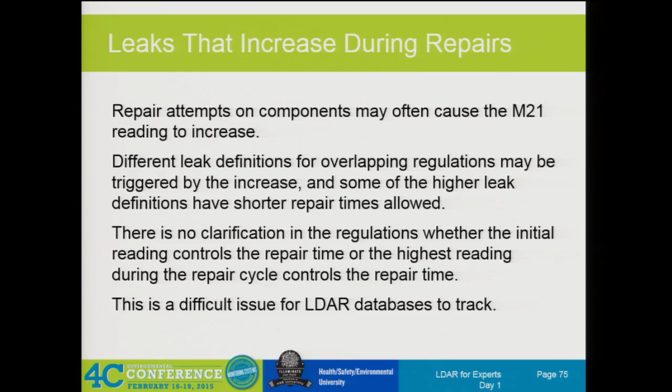All right. Well, we kind of talked through the examples, but same thing. Most defensible is keeping separate books so that you get it all there, but somewhat more workable is to put everything within the shortest deadline that might apply.

All right, capital expenditures aggregation. Those of you that have been around for a while, you've talked about these things, you've heard various things come together, but typically 1 to 2 years is the period you might aggregate expenditures towards deciding whether you trigger a modification or whether you trigger PSD or any of the other types of things that are out there.

When EPA brought the oil companies to the table to negotiate consent decrees, they alleged that they believed that the companies had intentionally limited the amount of work they would do at each turnaround, maybe 4 or 5 year periods, to stay just under the modification threshold.

And their option was, you can go to the table and negotiate with us on some beneficial environmental improvements to your program along with a civil penalty, or we'll come in and go through your books from the day you first started this unit, and we'll look at every project you do and we'll calculate whether or not it triggered it. And if we found it was triggered sometime in the past that you didn't apply, then we'll charge you $10,000 a day from then to now. And so obviously, most people said, well, let's sit down and talk about this. We don't have to get nasty.

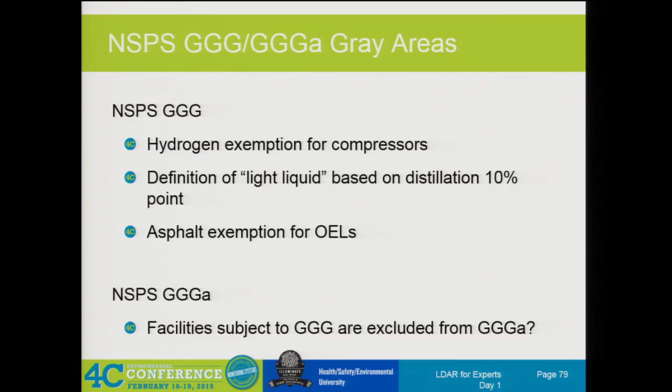So we finally finished the gray areas in NSPS VV. We've got about 7 minutes till lunch. We can probably get triple G out. There's just a few of these because it's a very short rule. Triple GA, even less, but the one that it's got is a doozy.

Okay, hydrogen compressors. They have an exemption for hydrogen compressors if they're over 50 volume% hydrogen. This is the only place in all of the LDAR regs that they use volume%. So I don't know why. It's the most common way. If you send your hydrogen to your lab for a purity check, it comes back in mole%, which is same as volume%. So maybe that was why they did it.

It's really not too gray on the compressors, but where we do get people confused and making a mistake is the compressor itself may be exempt, but all the piping and the components on the suction and discharge lines are just subject to the 10 weight% applicability. They're not on this 50 volume% exclusion, which is only for the compressor itself.

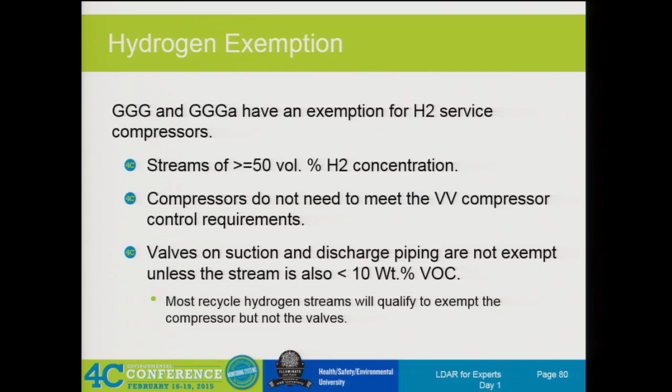And when you go from volume% to weight%, where hydrogen is a major component, molecular weight 2, if you go up to propane as the lowest molecular weight saturated VOC, 44, so you got a ratio of 22. So if you have a 0.5% by volume of C3 plus in your recycled hydrogen, it's over 10 weight%. And that's one that a lot of people miss.

Light liquid definition. This one's not really gray too much. You know, the one in VV said if you've got more than 20% of the chemical components that have a vapor pressure over 0.3 kilopascal. My favorite unit that everybody just has a gut feel for what a kilopascal is. But yeah, if 20% of your components have a vapor pressure over that, it's a light liquid. You get into a refinery, we say, hell, we can't even define 20% of our components.

So we got isomers out there that, after C8 or 9, there's dozens or hundreds in the 10, 11, 12 carbon numbers. So we can't identify all these things, and we don't have vapor pressure data on all of them either. So they said, okay, what do you do on a regular basis? And they said, well, probably our distillation test is the most common thing.

So they got their ASTM D86, and they actually wrote this into the rule that if 10% or more evaporates by the time you get to 150 C, 302 Fahrenheit, that's a light liquid. If you have less than 10% evaporated by the time you reach that, or you don't reach the 10% point till higher than 150 C or 302 F, then that's a heavy liquid.

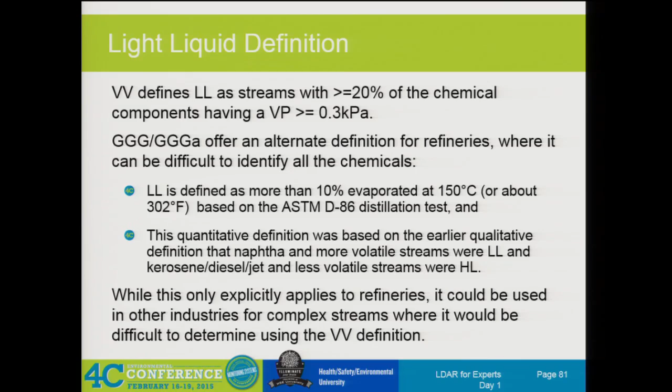Thankfully, they didn't realize what they were doing. Nobody has considered all of those lighter end heavies to be light. And so they just ignore the fact that they screwed up the language, and they're going on as if it said 10%. That's the kind of thing that somebody is going to see and start wanting to apply someday. I just know they are. That's the way enforcement works.

But we'll see. All right, and they also put in an asphalt exemption for open-ended lines in triple G and triple GA. Why would they do that? Yeah, it's very, very heavy. Not much volatiles in there, so you're not going to have much of a vapor leak from it. But if that was the case, why not exempt all heavy liquids from open-ended line requirements?

Why just asphalt? I suspect it's a safety issue. I suspect that somebody closed a valve, put a plug in, it leaked through, the ambient temperature cooled it, it solidified. The operator comes out, he's supposed to drain this thing. He pulls the plug, he opens the valve, nothing's happening. He goes and gets a steam hose, gets that on there, he gets a rod, starts rodding it. Pretty soon he breaks through, and hot pressurized asphalt sprays out and burns him.

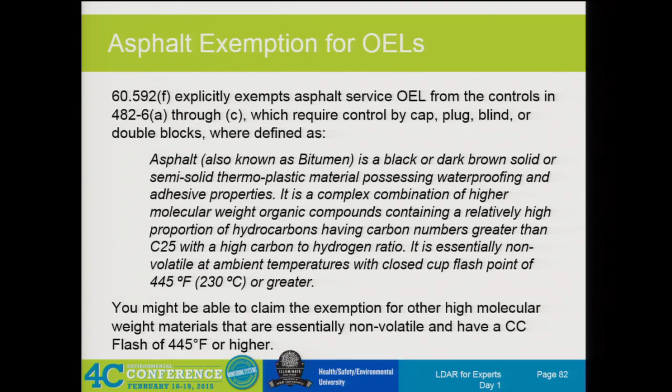So I think it was that kind of scenario. But even then, why just asphalt? Why not anything that would solidify at common ambient operating temperatures? I don't know. So if you want to use it for anything else, that's a risk-based extension. They've only got it in there for asphalt.

Then we got the trigger exclusion language. Almost every one of these rules, kind of the last sentence in applicability has something like this. And this is the one in triple G. It says, facilities subject to VV, VVa, or KKK of this part are excluded from this subpart. So if you're already on one of these that all point back to the requirements in NSPS VV, then you don't have to do triple G.

Makes sense. But the one in triple GA says facilities subject to VV, VVa, triple G, triple K are excluded from this subpart. Some people are reading that and interpreting that once you're subject to triple G, you can never modify up into triple GA. I'm relatively certain that was a typo or a mistake.

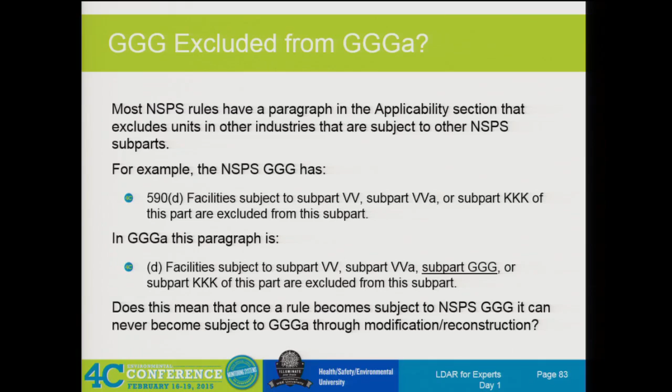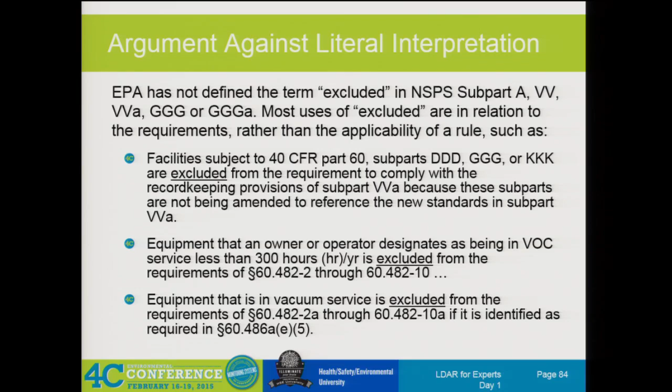So we got some interesting arguments on this one. You can look at the way excluded has been used, and most of the time it's excluded from the requirements. So the triggering is in the applicability, not in the requirements. So maybe that's what they meant, huh? So that's basically, we already talked through that stuff.

Preamble guidance: these requirements will only apply to sources that commence construction, reconstruction, or modification after the November 7th, 2006 proposal date. So they're saying that you could modify in, but that could be an existing plant that never triggered triple G could now modify into triple GA. Okay, so it's still not explicitly saying you could go from triple G to triple GA.

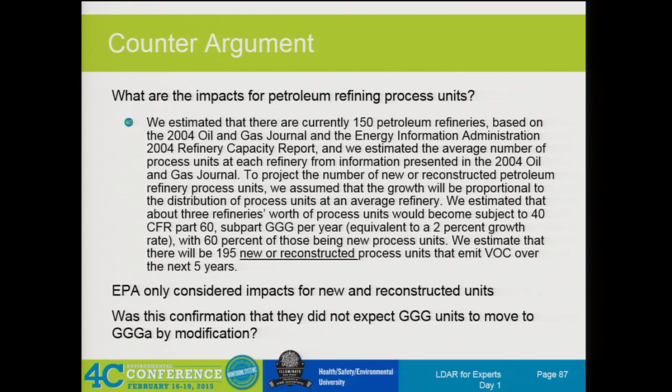And look at it, impacts. They estimated the number of new and reconstructed process units. They didn't estimate the number of modified. That kind of makes it sound like they weren't expecting you to modify into triple GA. So we got these things kind of offsetting each other, neither one explicit.

Then we have out of Washington State, one of the refineries was doing some extensive rework on a crude unit, and it was already subject to triple G, so they wrote to Region 10 and asked them whether that would trigger triple GA or not. And they got a letter back that said, well, the letter that they sent included a conversation that they had earlier had with somebody in headquarters, in OECA, I can never remember the name for that, the Office of Enforcement and Compliance Assurance, maybe, something like that.

And on the phone, verbally, one of the EPA people said, of course, you can modify up from triple G to triple GA. The people in Region 10 looked at it, sent the refinery a letter, I've got a copy of it if anyone would like it, saying that they considered the language to quite clearly indicate that units subject to triple G would be excluded from all applicability to triple GA. And they indicated they found no other reason to doubt that. So we've got two EPA offices that can't agree on this one. Exactly what the ADI was put together to avoid.